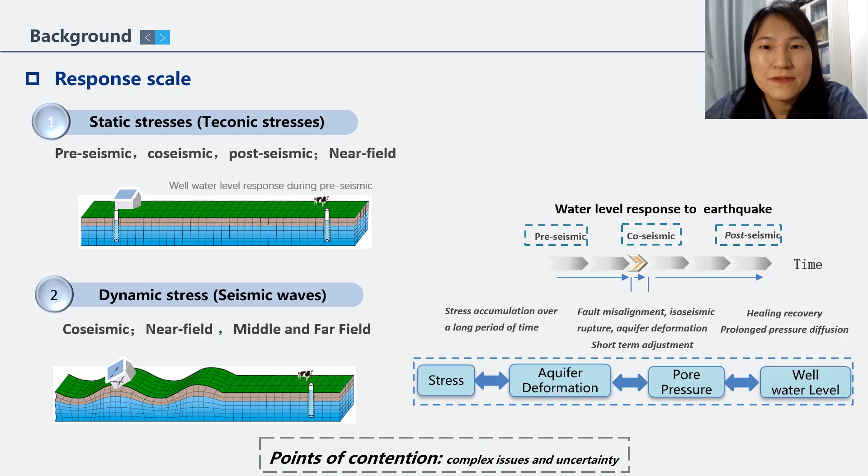Additionally, research on pre-seismic and coseismic response has been separated temporally due to different physical mechanisms and research objectives. In this study, pre-seismic and coseismic response are considered as continuous processes that involve a series of physical phenomena, including strain, pore pressure, or water level changes before and during an earthquake event.

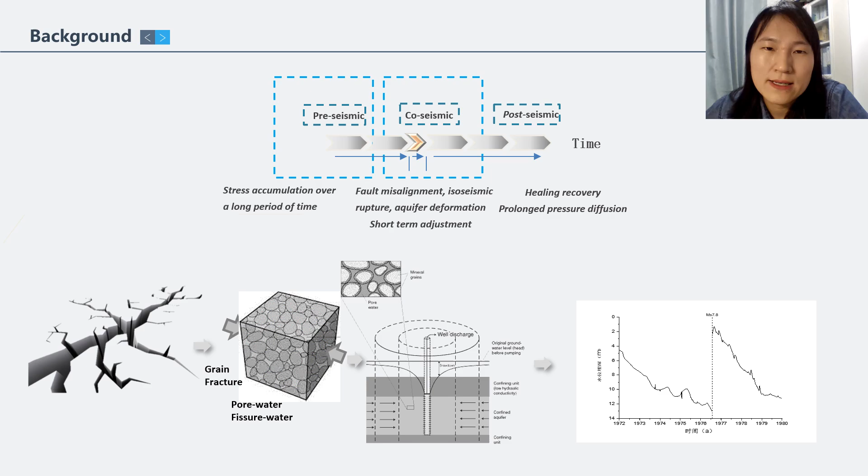This study aims to establish quantitative relationships between these response processes and hydrogeological parameters, as well as rock mechanical properties, thereby revealing the underlying physical mechanisms governing the continuous pre- and coseismic response of well water levels.

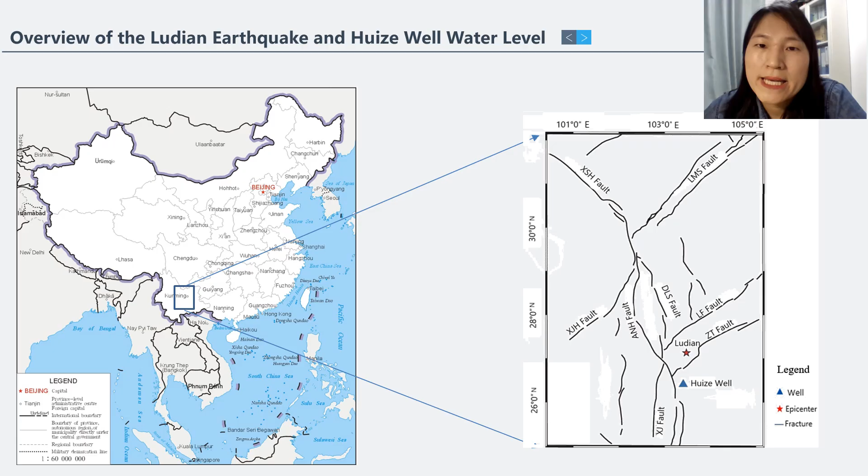This study examines the continuous well water level response to the Ludian 6.5 earthquake, especially focusing on the Huize well. The Ludian earthquake occurred in the southern region of the junction between the Bayan block, the Sichuan-Yunnan block, and the South China block. The epicenter was located near the Baogunao Xiaohe Fault and the Zhaotong Ludian Fault, with a focal depth of approximately 20 kilometers. We went to the site of Huize Well for investigation in 2022 and obtained well data.

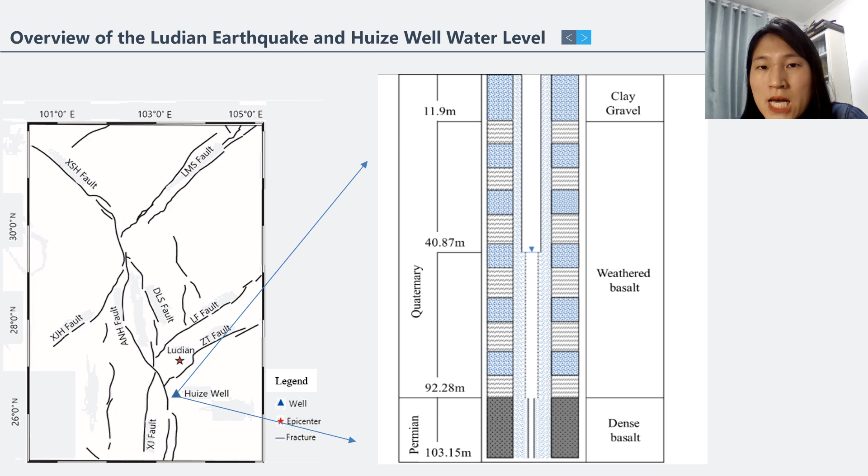The depth of Huize Well is 103.15 meters, with casing extending to 87.8 meters, resulting in water level depths of approximately 30 meters. The groundwater type in Huize Well is classified as fissured confined water.

The high-value anomalies in the water level of Huize Well demonstrate a significant predictive capability for earthquakes occurring east of the Sichuan-Yunnan rhombus block. As summarized in the table, based on literature records and field investigation conducted at the Huize County Seismological Bureau, Huize Well has shown clear pre- and coseismic response to multiple near-field earthquakes.

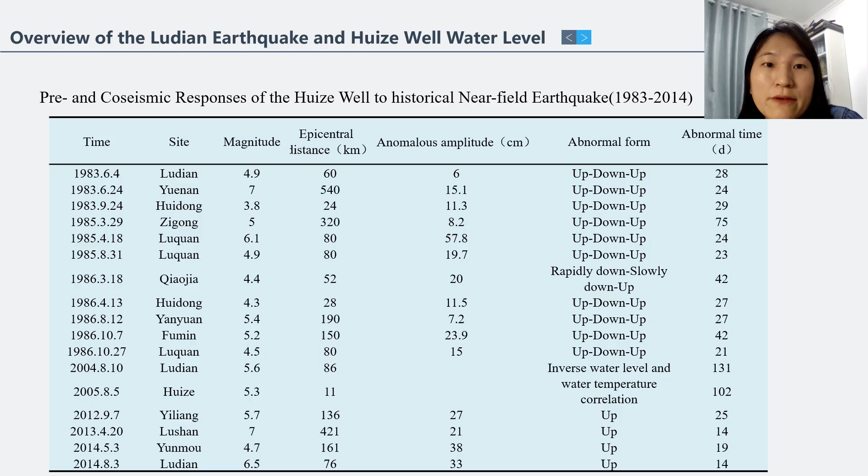Regarding the Ludian earthquake, following the Yongshan earthquake in April 2014, the water level in Huize Well gradually declined from a high state. On July 21, a sudden turning point was observed, leading to an accelerated rise in water level, which continued until the occurrence of the Ludian 6.5 earthquake on August 3. The water level rose continuously by approximately 0.7 meters, with a pre-seismic anomaly lasting for 13 days, demonstrating a typical pre-earthquake water level rise.

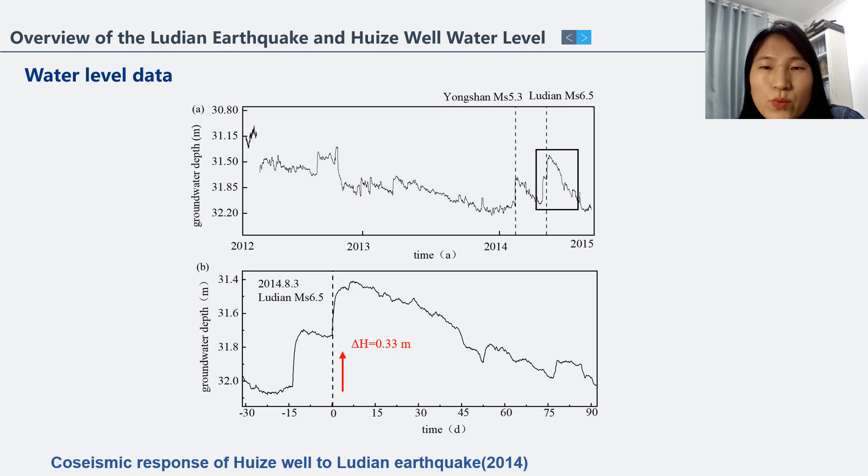Now let's discuss the construction of the model. Due to the spatial discrepancies between the regional scale of stress field evolution and the aquifer well flow scale, to achieve a more precise representation of this process, we separate the construction of two models: the pre-seismic and coseismic pore pressure evolution numerical model at the regional scale, which is employed to obtain the pore pressure evolution at depths within the aquifer near the fault zone, and the aquifer well water level response numerical model at the local well flow scale. The pore pressure serves as an interface for coupling the two models, allowing us to obtain the continuous response of well water level to the pre-seismic and coseismic process.

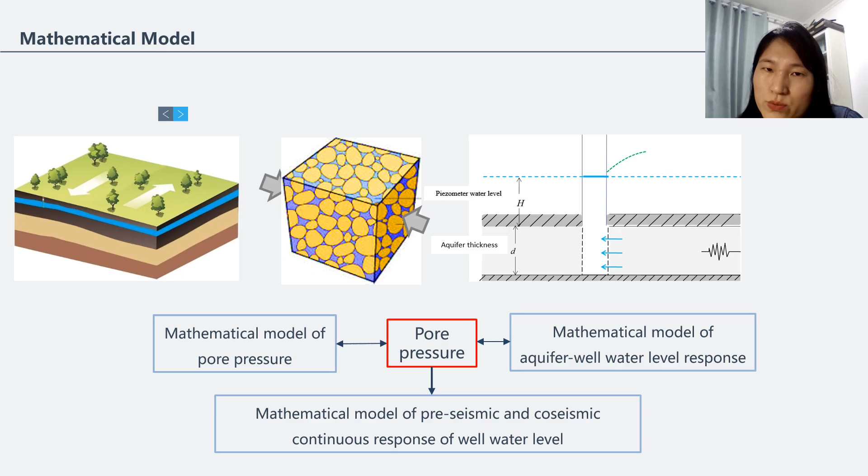To simplify the calculations, the following fundamental assumptions are made. For example, the fault is treated as a strike-slip fault, neglecting the vertical displacement. The geological body is unaffected by external forces prior to the application of boundary condition loads, with stress beginning from zero. We construct the following conceptual model.

The stress accumulates from zero, using the GPS velocity field as a reference constraint, decomposed into velocity components applied at the boundary of the solid mechanics for regional stress loading, simulating the accumulation process of pre-seismic stress. During the boundary stress loading, the friction coefficient on the fault plane is relatively high, leading to gradual strain accumulation around the fault.

A reduction in the friction coefficient triggers fault slip, simulating the occurrence of an earthquake, with the strain field undergoing rapid adjustments to constrain coseismic slip by fault displacement. Once the fault displacement is achieved, the application of velocity components at the boundaries of solid mechanics ceases.

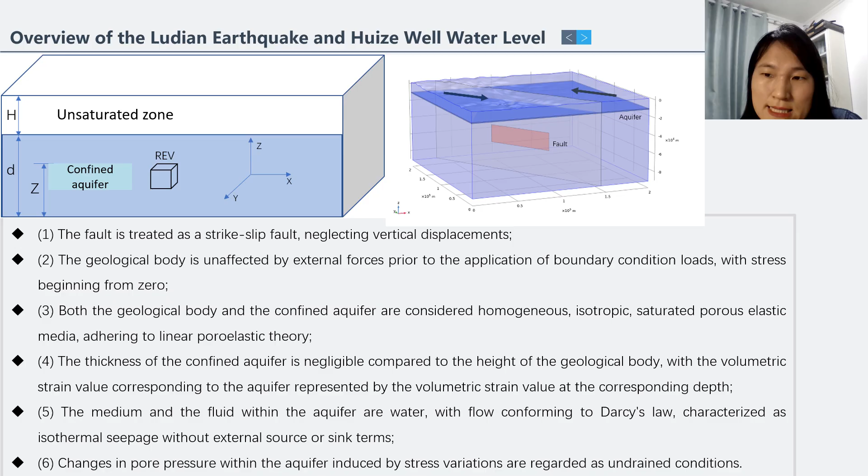Now we may further analyze the mentioned mathematical model. We sorted out the theoretical framework and summarized the above physical process into 4 levels and 3 solving processes of strain field, pore pressure, and water level.

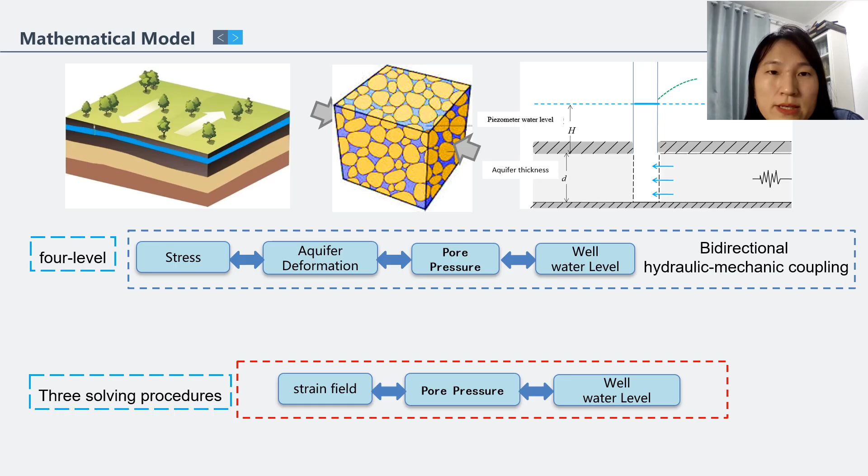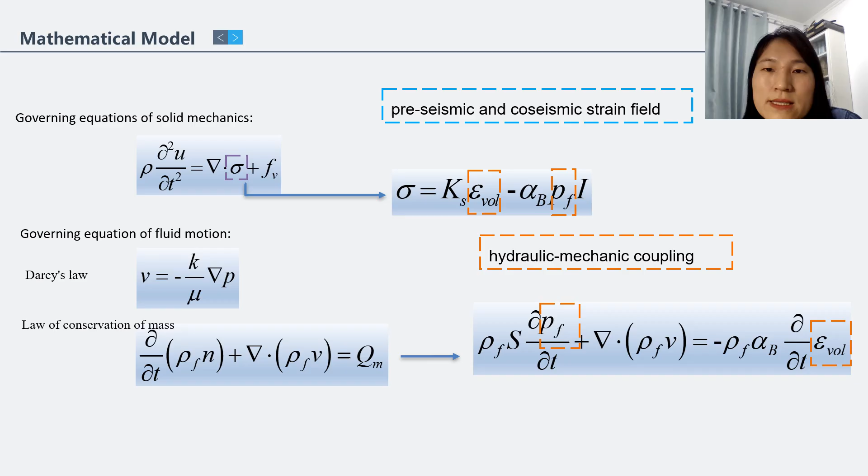The governing equation of solid mechanics can be simplified to the following form to describe the variation of the strain field. The governing equations for fluid motion are represented by Darcy's law and the mass continuity equation.

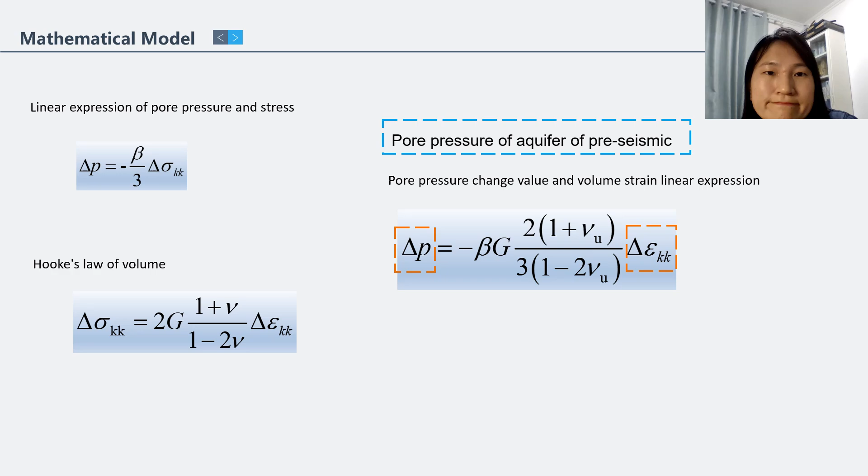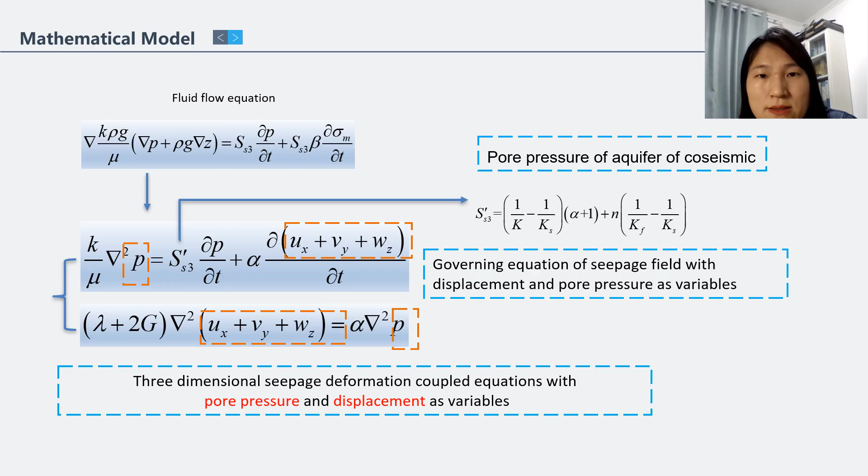The strain values corresponding to the depths of the aquifer are extracted, and the pore pressure evolution of the target aquifer pre-seismic is obtained based on the linear equation between pore pressure and volumetric strain. The pore pressure is solved using a three-dimensional coupled equation set of seepage and deformation with pore pressure and displacement as variables.

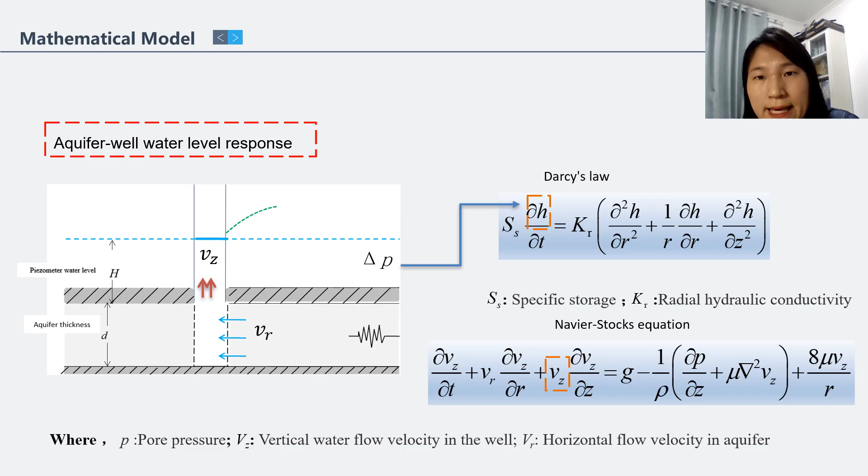The Navier-Stokes equations are employed as the flow control equation for the water body in the well. This study employs the multi-physics finite element software COMSOL to conduct simulations, achieving fluid-solid coupling in a porous elastic geological body.

The assembly model simulates the sliding of the two sides of the fault, and the PDE mathematical model solves the three-dimensional coupled equations of seepage and deformation with pore pressure and displacement as variables, ultimately obtaining the pore pressure evolution of the target aquifer pre- and coseismic.

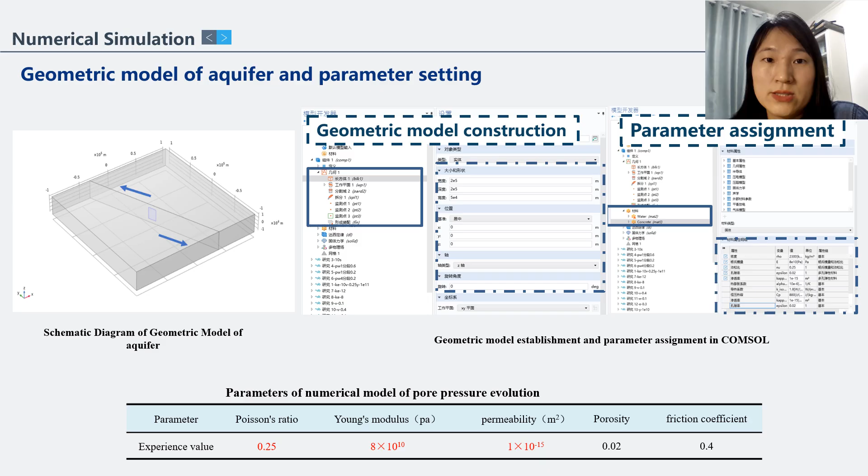Finally, by constructing a local well flow model, the response simulation of well water level to changing pore pressure is realized. Now let's explain the process of constructing the numerical model. Firstly, considering the spatial position of the well relative to the fault, geometric model construction and parameter determination are completed.

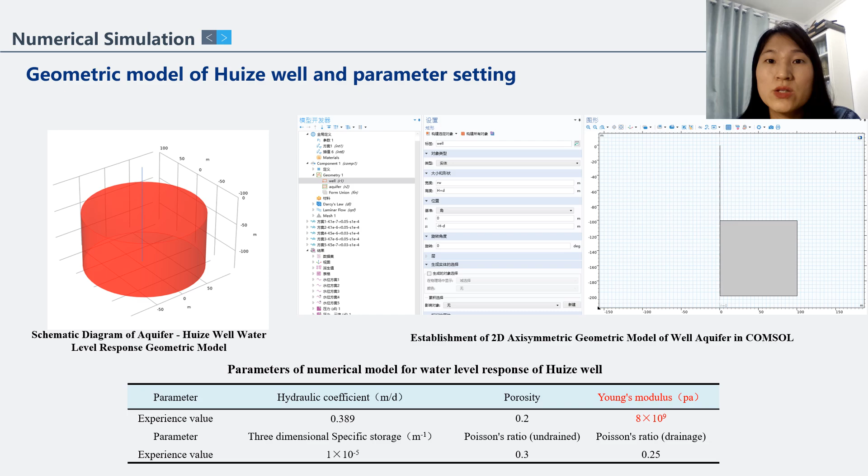The aquifer well water level response model is established as a two-dimensional axisymmetric model centered on the wellbore. Secondly, the pore pressure evolution of the aquifer before and during the Ludian earthquake under different parameter schemes is simulated.

Using parameter scheme 1 as an example, the excess pore water pressure and negative pore water pressure during the pre-seismic and coseismic phase exhibit a quadrant distribution. The negative pore water pressure areas are aligned with the proposed rupture surface of the fault corresponding to the tensile strain zones, while the opposite quadrants correspond to the excess pore water pressure zones and the compressive strain zones.

The rapid change in pore pressure accumulated near the fault zone pre-seismic is due to the reduction of the friction coefficient to 0.4, leading to fault movement. The negative pore water pressure quickly adjusts while excess pore water pressure continues to accumulate, with the well situated within a region of excess pore water pressure.

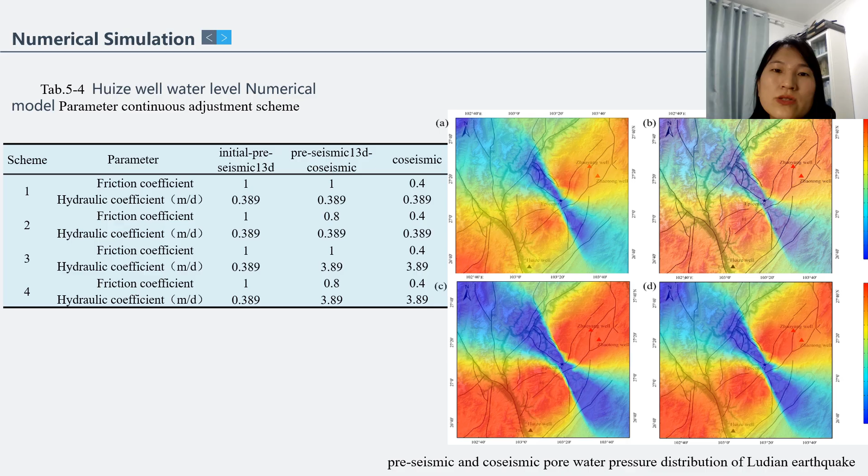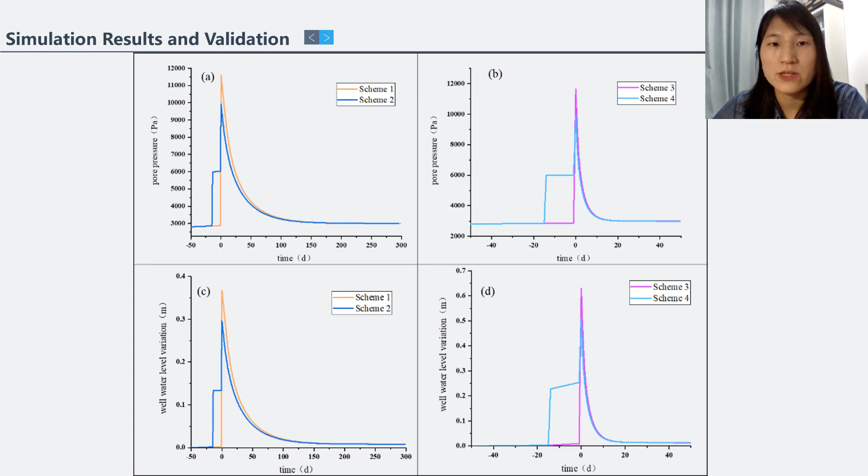The well water level was in a slow rising phase before the earthquake, while a rapid increase in water level occurred during the coseismic phase due to the rapid adjustment of the strain field. The rising trend before the earthquake is influenced by the friction coefficient, while the amplitude of water level changes and the recovery time during the coseismic phase are significantly affected by the aquifer hydraulic conductivity.

So comparative analysis shows that in parameter scheme 2, where the friction coefficient changes in a gradient of 1, 0.8, and 0.4, while the aquifer hydraulic conductivity remains constant at 0.389 meters per day, the continuous response simulation of well water level before and during the earthquake phase agrees well with the measured results.

After parameter identification, a comparison of simulated well water level values against measured values for the Huize well's response to the Ludian earthquake before and during the event is presented in the figure. When comparing the measured water levels with the simulated levels, the trends are generally consistent, with a measured pre-earthquake water level increase of 0.3 meters and a coseismic water level increase of 0.33 meters, displaying a sawtooth fluctuation pattern, with the measured values being higher than the simulated values.

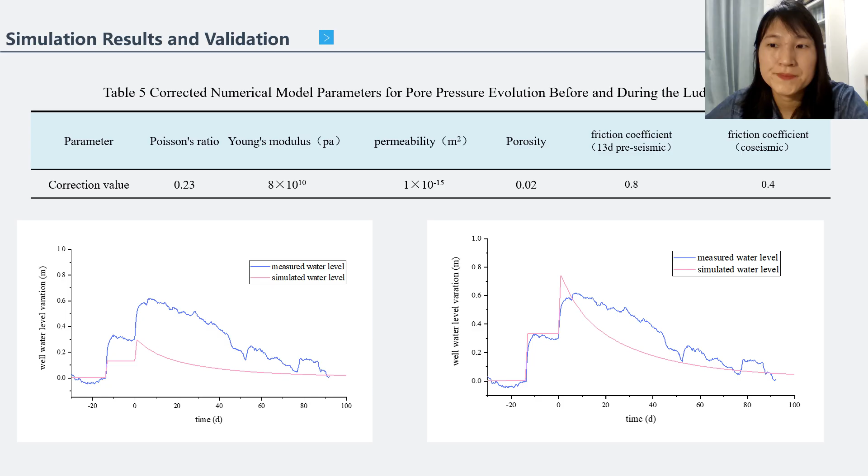Due to the irreproducibility of actual earthquakes, the validation of the Huize well water level response simulation results for the Ludian earthquake before and during the event is conducted from several perspectives. Firstly, using the coseismic strain field based on the dislocation model to validate the distribution and numerical magnitude of the strain field in this model. The extrema are distributed on both sides of the fault, with the order of magnitude being 10 to the power of -6, as shown in the table.

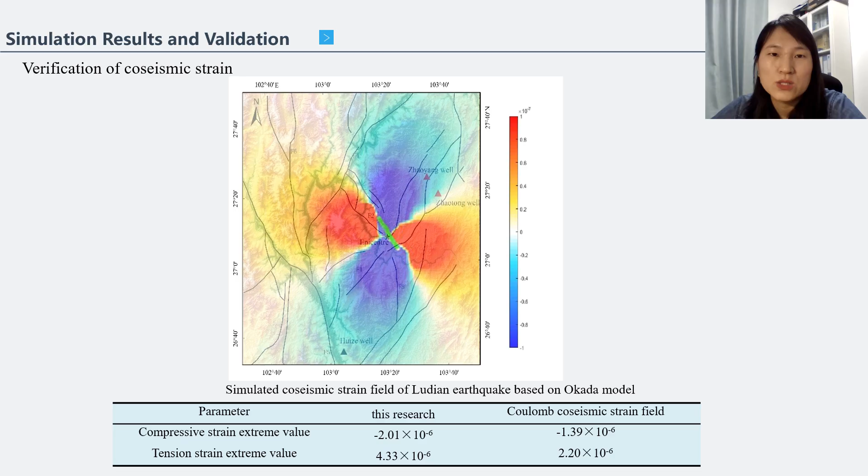It indicates that the coseismic strain field calculated using Coulomb does not consider fluid-solid coupling, resulting in a smaller range of extremum absolute values compared to those in this research. Secondly, validating the pre-earthquake and coseismic water level trends using other observation wells near the fault.

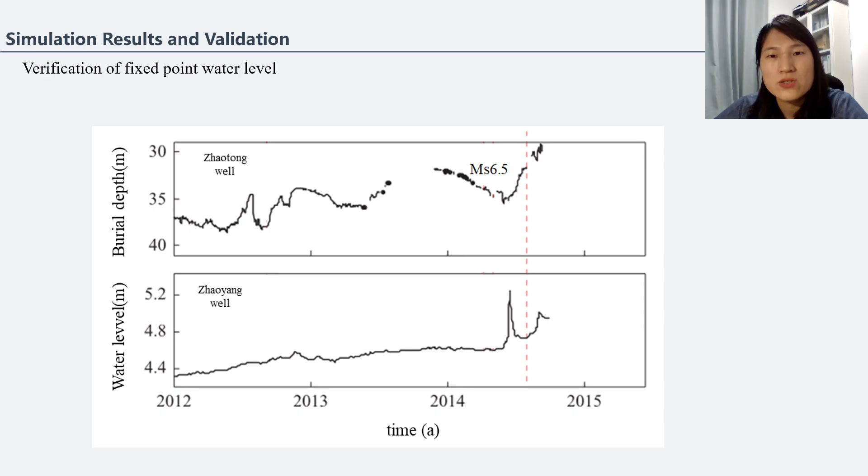The Zhaotong well and Zhaoyang well are located within the static strain field of the Ludian earthquake and exhibit significant coseismic response. Both wells are located within the excess pore water pressure zone before and during the earthquake. Furthermore, due to coseismic adjustment, the compressive strain values in the areas surrounding these two wells rapidly increase. The measured water level data from both wells show an upward trend before and during the earthquake, corresponding well with the simulated results of the pre- and coseismic pore pressure field adjustments.

In conclusion, we have developed a novel two-part numerical framework that successfully simulates the continuous pre- and coseismic water level response as a single integrated process. This model has also been applied in other regions in China, for example, the Shuangqiao well to the Tangshan earthquake. It has achieved the desired result.

This work moves us from qualitative observation to quantitative physics-based analysis. It allows us to use water level data to inversely estimate crucial in situ parameters like fault friction properties and aquifer hydraulics. This has significant practical implications for earthquake monitoring, bringing us a step closer to developing physically meaningful precursors for earthquake forecasting.

Of course, our model is a simplification. The main limitation is the separation between the pore pressure and well response models. Our further work will focus on developing a fully integrated three-dimensional coupled model that seamlessly connects the strain, pore pressure, and water level processes across all scales, from the fault zone directly to the well screen. Okay, that's all.